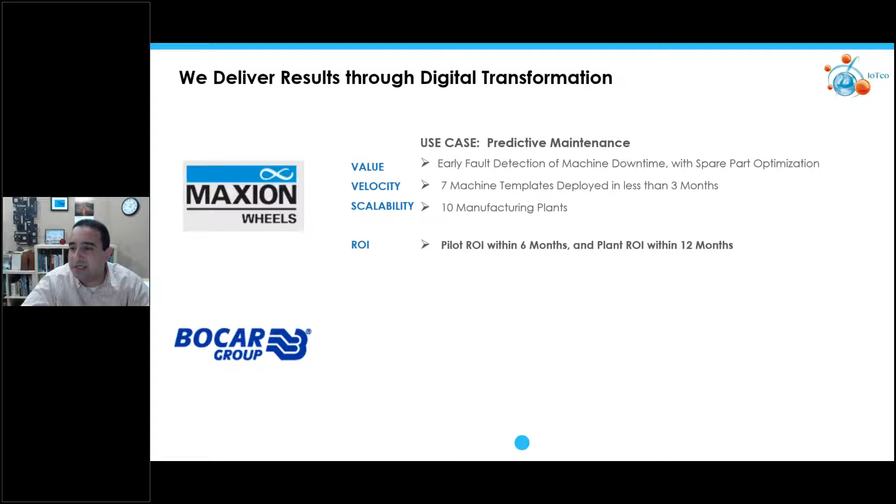But the use case that I'm going to come back to at the end of this presentation is focusing on predictive quality of high pressure die casting. It's a very unique industry. Did you know that the industry norm scrap rates within casting are somewhere between 9 to 15%? So just imagine you're scrapping 9 to 15% of your parts, and it's considered industry normal. You're doing great.

So by using industrial AI in the case study that I'll show you at the end of today's presentation, and correlating the machine parameters, there's about 40 to 50 casting parameters every shot, every 6 seconds, and correlating them to the quality output. Am I going to make a good part? Am I going to make a scrap? Doing this every 6 seconds for every shot of aluminum cast going to the machine can be significant ROI for the business.

We actually call this project the power of 1%, because a fractional 1% reduction in scrap in a mid-sized casting plant, which is about 25 to 40 machines, is around $250,000 in savings per plant per year. That usually exceeds 100% ROI for all the software and the infrastructure that you need to put in place to make that happen. Predictive quality is critical to businesses today. There are some gaps, some barriers that we're going to talk about to make this example happen.

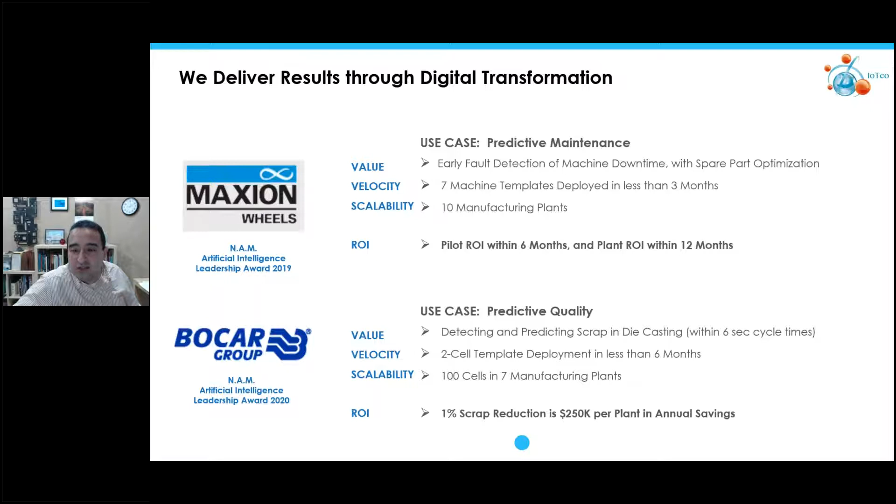Bocar actually received the 2020 AI Leadership Award from the National Association of Manufacturers last year, and I'll be shortly presenting that case study today. So what is Quality 4.0?

Let's start from the fundamentals. There's a lot of definitions out there, but I like a very simple one: it's really the application of fourth industrial revolution digital tools to quality management within the value chain.

Quality 4.0 is not just about manufacturing. My presentation today is focused on manufacturing, but Quality 4.0 has many applications across the whole value chain. This is a great study actually, I can share that with you, but you can also Google it online.

So it's a great publication, but it's also important, as with any other strategy, that we create a clear vision and a clear roadmap of what Quality 4.0 means to your business, and address the people, process, and technology components to ensure success with Quality 4.0. Great publication, BCG and ASQ.

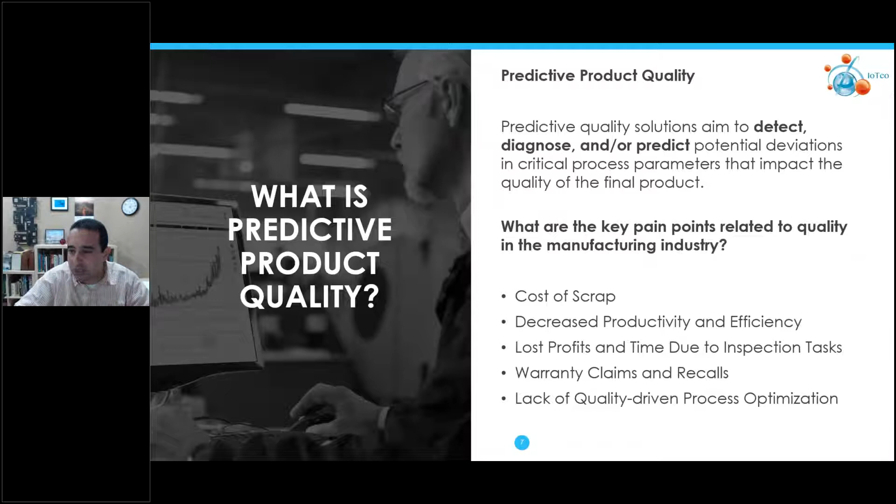So how can we use predictive quality techniques to catch quality issues right at the source - right at the casting machine, right at the CNC machine, right at the molding machine - depending on what is critical for your business?

So keeping this definition in mind, our goal here is really to create a multivariate model. There's a lot of inputs that could affect the quality of the part: there are process parameters, material properties and characteristics that have an impact, product specifications, and inspection and quality information. We need historical data about inspections to be able to build and train these AI models. Not to mention, expert domain knowledge needs to be leveraged into those models to ensure the accuracy of the predictions.

I like this definition because all these areas, all these inputs, need to be leveraged in the configuration and development of a predictive quality solution in order to support the ROI areas and use cases that we discussed, shown here.

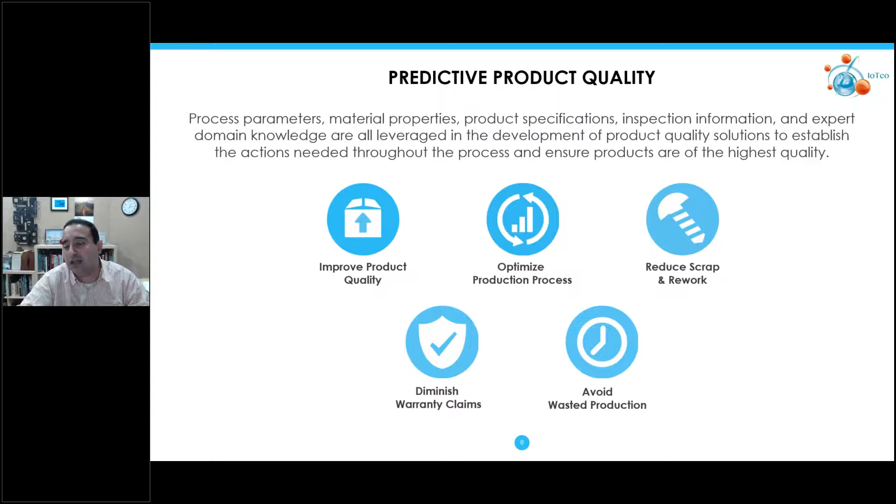And sometimes it's not easy to capture all that data, right? It's not easy to synchronize all that data and bring it together in one place in a synchronized fashion so you can actually run these models. That's one of the bigger gaps.

But before talking about gaps, the application I'm going to show today is automotive centric and consumer packaged goods. But many applications are out there. Think about your business in the electronics and semiconductor industry, making chips.

We had projects where, if you think 40 data parameters in a casting machine every 6 seconds is a big number - in the semiconductor industry there are about 1,000 chemical-based process parameters collected in milliseconds in some cases, that need to be analyzed very quickly, which would indicate the quality of the wafer, the semiconductor chips being produced in a fab, a fabrication area.

So it becomes a big data project, and ingesting that data, working with that data, converting it into actionable information is not an easy task. It requires analytical solutions implemented in a systematic way to improve quality for those, in some cases, heavily regulated manufacturing sectors like semiconductor and food and bev.

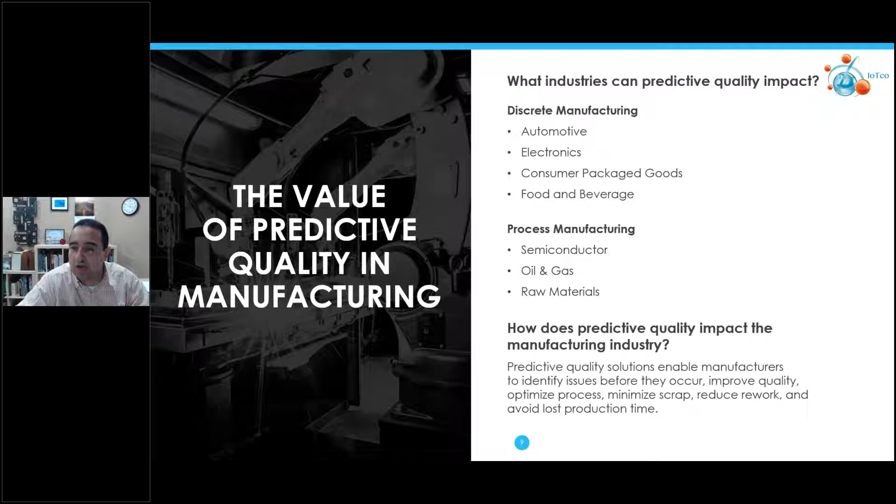So what do we need to make this happen? I'll show you the case studies, but I think this is a great summary of all of them. We need inputs - we need historic product quality data. To model and create any AI type of template, historical data is required.

In unfortunate cases, this may not be available, so we'd have to implement a system and collect that historic data in a synchronized fashion. Expert domain knowledge is always key initially to understand the different product IDs running on the machine. Every product ID has different thresholds, different material characteristics, and so on. That needs to become part of the data map or data model that I'm injecting into my analytics.

And availability of key signals - so we can do this offline, but how can I implement this online? How can I implement this with direct integration to the PLC on my machine, on my line, and an image camera on the cell, being able to handshake the machine data and the quality data? So connectivity and infrastructure are key areas that need to be prepared for us to run these solutions online.

So what is the output? Obviously we're predicting part quality - green, yellow, red. Is this going to be a good part predicted, or a bad part? But in some cases there are suspects - we call them yellows. To be conservative, to be cautious, the yellows and reds, the suspects and the rejects, are rejected, and the green can pass. So that's predictive part quality.

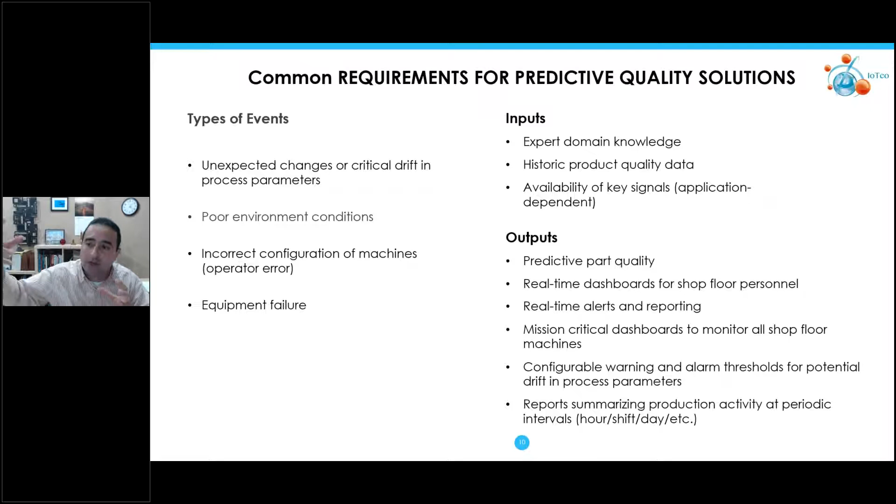And mind you, clients today are using SPC products, statistical process control. But in many cases those SPC solutions are looking at a single variable at a time. The use of predictive quality enables us to use AI and a multivariate approach that looks at all the parameters being collected - 40 parameters, 1,000 parameters - and making correlations. SPC is usually not geared towards that, so predictive quality is a natural extension of using SPC on the factory floor.

So with this short introduction on some thoughts around what is Quality 4.0 and what is predictive quality, I'd like to browse through some case studies and then give you a short motivating conclusion at the end.

So we're talking about what is the relevant synchronized data for predictive quality. We're talking about asset-related data coming from the machine control, process parameters like temperatures and pressures and critical variables that indicate quality, and quality characteristics. Some of them come from the machine, some may need add-on sensors like image data or even video data in some applications.

And then we're talking about ingesting that data, synchronizing it, making sure it's labeled in a proper way for the application, and then starting to correlate the machine data with the quality parameters and delivering use cases for the client.

So when it comes to predictive quality, we're talking about two key metrics here. We're talking about part health: green, yellow, red - good part, suspect part, reject part. So just imagine converting all that data into a decision on part health, and the process behind it that I'm going to show.

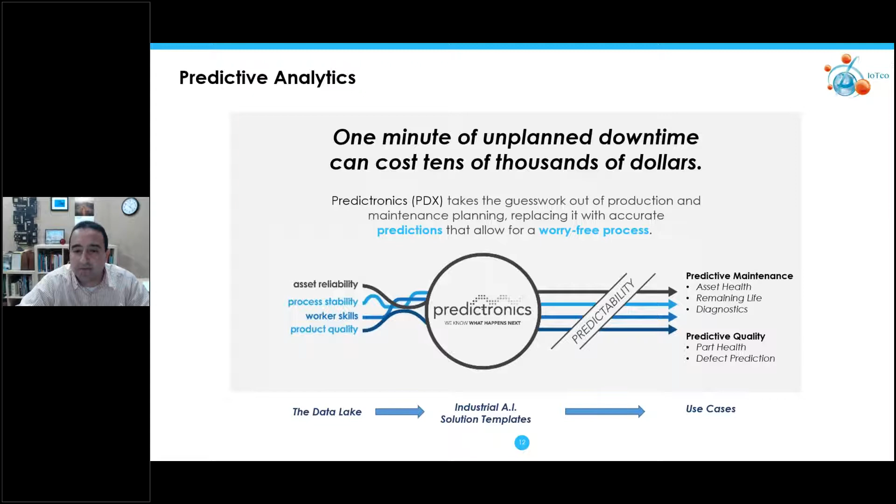So now if we take this and look at the actual process that makes it happen, it is important to follow a systematic process. So the process starts with data collection. It goes into preparing that data, ingesting it, processing it, making sure the data is usable. Some data is noisy, some data requires outlier removal, filtration, and other techniques.

And then feature engineering - extracting statistical metrics from the raw data that are meaningful, that are highly correlated between the process and the quality, the machine and the quality. That's the handshake that we have here.

And then training an AI model that allows us to assess the health of the part. What does green, yellow, red mean? What is part health?

And some of the applications we do are data-driven applications. They are multivariate - 40 parameters, 100 parameters come into the system. Meaningful, highly correlated features are extracted, and then we're able to create a model based on this.

So it's like a fingerprint. This is a fingerprint of a good part. This is a fingerprint or a signature of a part scrap. And it could be scrap type A, type B, type C, type D - you've got different types of scrap modes that occur in the manufacturing operation.

So once you have that labeled data, that correlated data, the solution learns those signatures, and that's your training - that's the training of the AI model. And then you're able to start doing predictions.

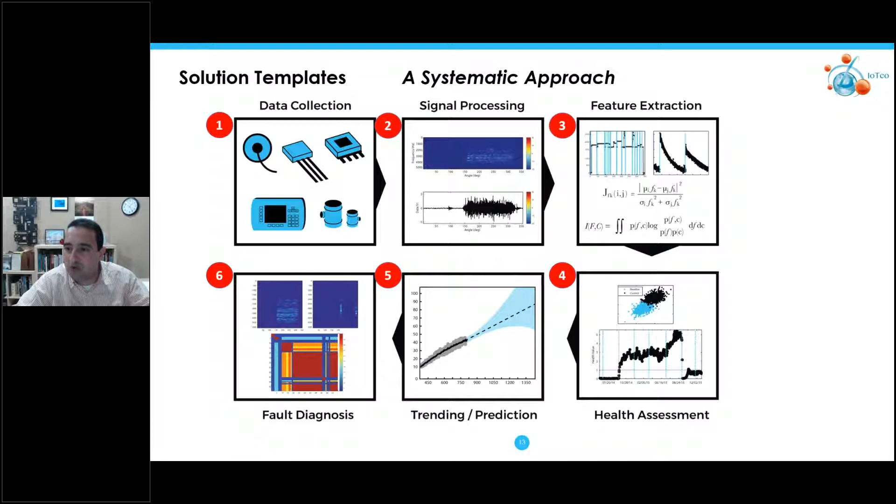And then diagnosis - what is the root cause? I'll show you some examples of how we're finding the root cause, which parameters, which signals are actually leading to the quality issue.

So the challenge here is, when you go into manufacturing, it is not just about robots. It's about - I have robotics, I have CNCs, I have casting and welding and molding, I have stamping. Different parts, different processes. So the systematic approach still stands, it's still the same, but there is a series of templates that need to be created.

Each one of these assets has a different behavior, different type of parts, has a different data map. There are specific parameters that indicate quality of a spot weld on a robot or a laser weld on a robot.

There are specific parameters that indicate casting issues, or my CNC machine has a tool creating the surface texture, the surface roughness of my part. So if there's a degradation in my tool or spindle, I'm going to start having a part with bad surface roughness in a precision industry like aerospace.

So many examples. My message here is it's important to apply a systematic process in different ways to allow the user to understand the specific data map and have that analytics workflow I showed, from signal to feature to part health, part prediction, and part diagnosis, in a systematic way.

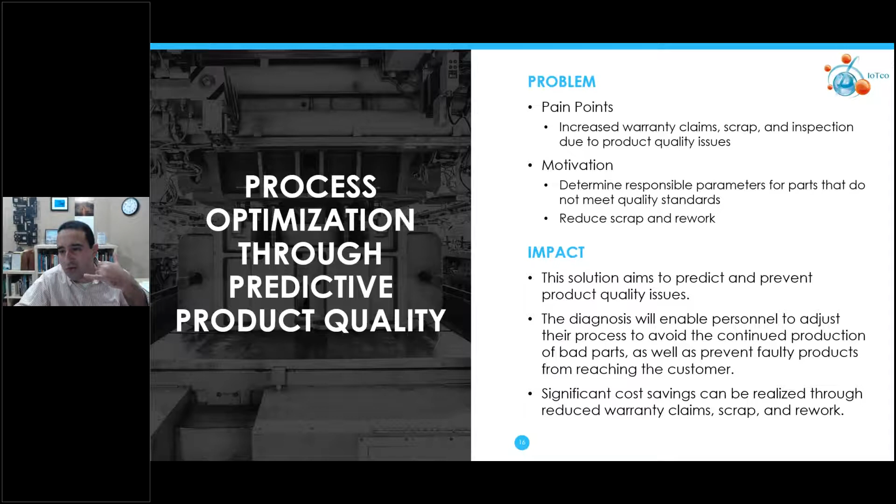So we went into this application and looked at the process. There's a steel coil, a forming station and a line, and then finished ribs like the one you see here. And then there's a defined data map—we need data from the coils, data from the forming stations, and quality data regarding the finished ribs.

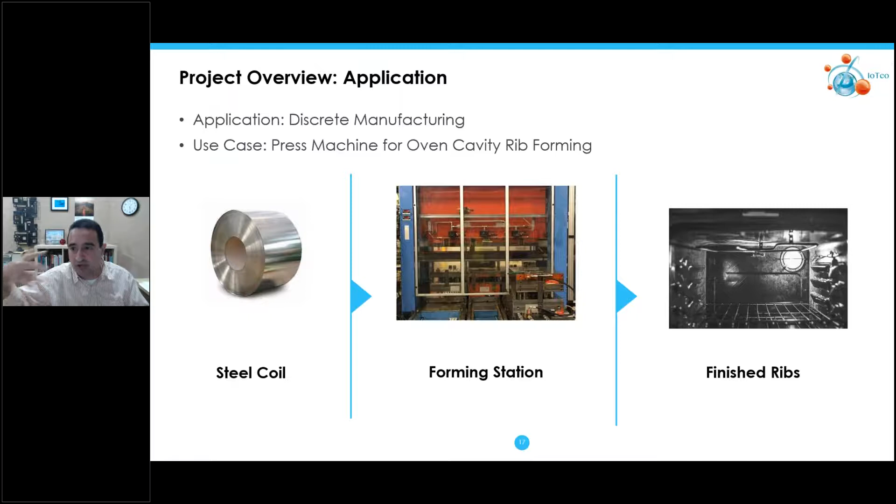And we want to implement an online system for predictive quality that predicts with the highest level of accuracy, right on the manufacturing floor, whether you're going to make an oven with a cracked door or whether this oven is okay to ship to the customer.

So to make this happen, there's a data map. Remember my picture—there's a data map, there's analytics, and then there's a deliverable. So I need to understand the material properties of that steel going into my line, because different material properties exhibit different behaviors on the manufacturing floor.

I need data from my forming station—the operational parameters and specific sensor readings. And that data needs to be correlated with the final product check. So there's a history of the final product check, and a history of some of the warranty recalls that occurred, and the serial numbers that were back-traced.

So let me summarize by saying there's a traceability system, and traceability is very important when it comes to predictive quality. You need to be able to serialize your parts with a QR or a label, and that part in a manufacturing setting is usually traced. There's an electronic trace record that tells you every operation, process parameter, and person—it's like a birth record, a birth certificate of the part.

So now when the predictive quality template is implemented, it's looking at the target quality, and it's making predictions on recommended operation settings of the line that allow me to maximize quality and reduce scrap on the line. So this is not just predicting defects on the line, but actually being prescriptive and making recommendations on the best offset parameters.

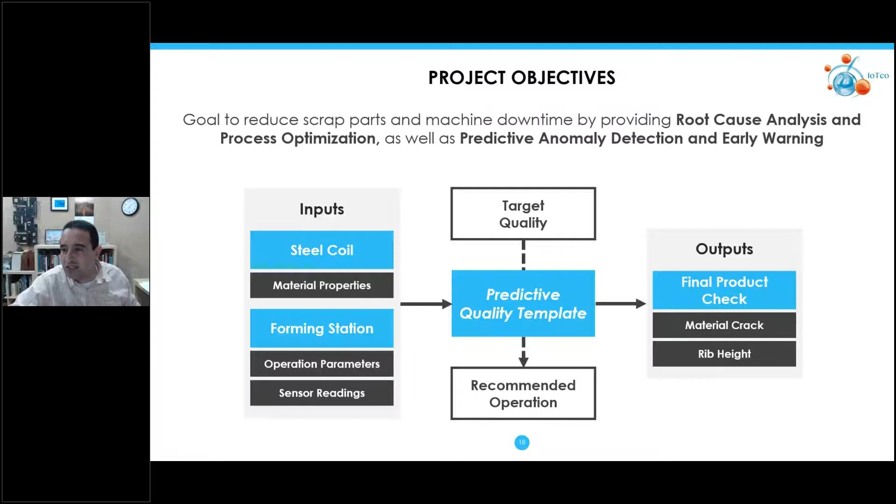So again, it's a maturity scale. We start with data collection, we go into predictive quality, and then we go into prescriptive decision-making or prescriptive quality. This is just an example of some of the information that is being accessed.

The rib height is key, so you're able to monitor the rib height over time. It is a multivariate system, of course, but you can go deeper and look at each variable and the impact of the rib height on the deviations of that variable.

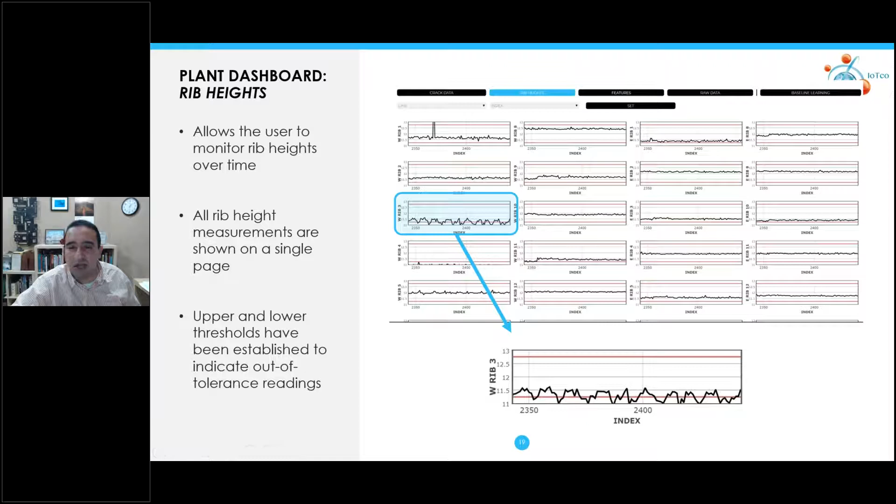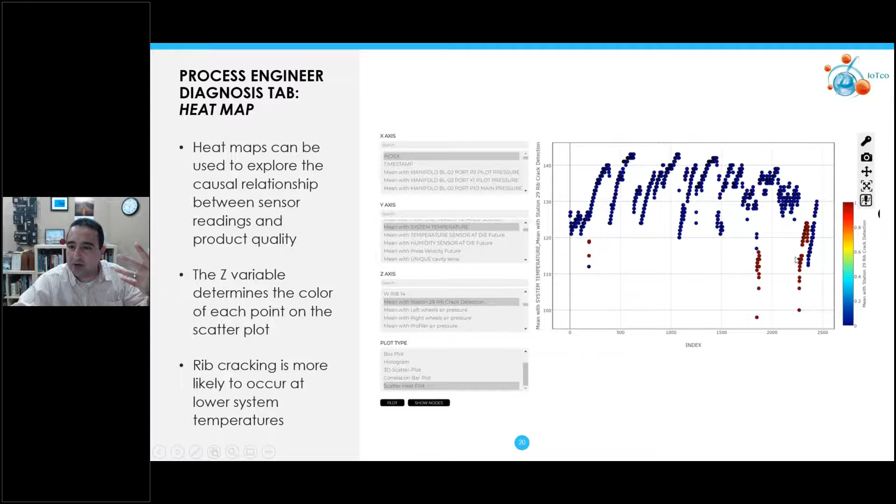All the reds here are actually defective oven doors that have been rejected on the line. In real time, the solution has made a decision to reject them. We visualize this in a user-friendly way for the quality manager, so they understand the temperature zones where there is usually an issue with the oven door. A temperature of less than 120 degrees usually has quality issues on the oven.

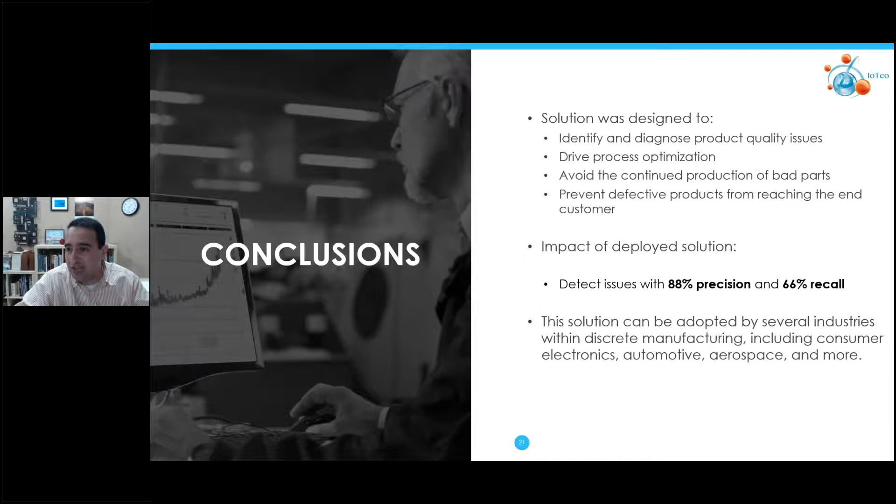For those who might be interested, we were able to hit almost 88-90% prediction precision accuracy on this application, which exceeded significantly the previous quality rates that were in place prior to this system. But at the end of the day, to make the system work, we need a specific data map that makes sense, with correlation to the quality labels and parameters on the line. And we need that business case we're trying to solve, which is: I have an issue on a specific oven type, and there are warranty and recall issues. How can I immediately tackle that problem using advanced analytics?

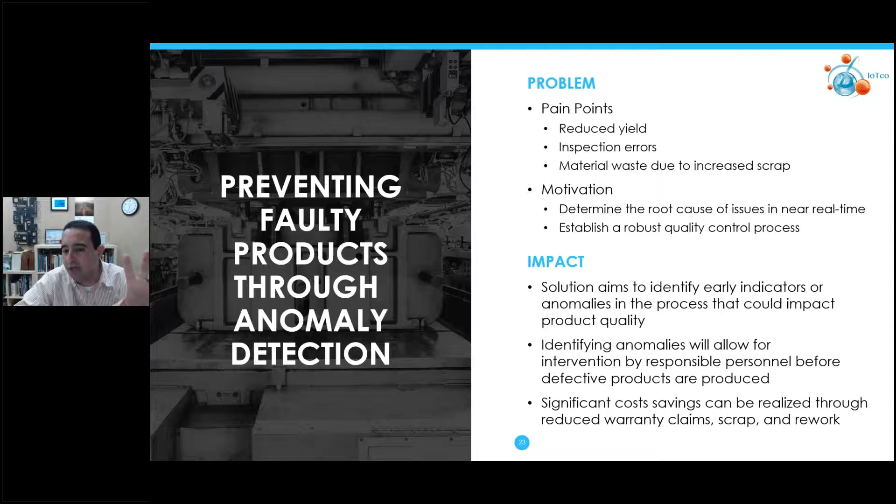Another example is from the automotive industry. Similar use case. If you're interested in the slides, please email me at the end and I'm happy to share them with you. But the motivation here is a little bit different, and I can talk to it.

These guys are making aluminum wheels. If you look at your car, your tires, you've got 4 tires, and the hubs and rims in the middle are actually produced by this automotive tier supplier. Nowadays it's mostly aluminum, because of the light weighting of vehicles.

Low pressure casting is a key application in this industry. In a low pressure casting machine, you're talking about 30 to 40 key process parameters. There's a robot that picks up the part and sends it to machining, first taking it to the X-ray. But due to the volume of wheels, I'm making a wheel every 15 seconds, I cannot inspect every wheel. There's an X-ray machine that inspects, but the inspection time is long, so I have to inspect in a more selective manner. So they started making a lot of scrap, more than normal.

We implemented a predictive quality solution that took historical data from the X-ray, which is pass-fail data, along with the casting parameters. We implemented a predictive quality model that could easily display and auto-reject wheels that are non-conforming.

Imagine you're running this casting cell and seeing this in real time. Green is an acceptable wheel, a good part. Yellow is a warning or suspect wheel that could be bad, because the model's confidence wasn't high. Red is a high prediction of a quality issue. It's visual - you can remove the wheels manually from the line and reject them, or in this case, the robot is automated to auto-reject the wheels.

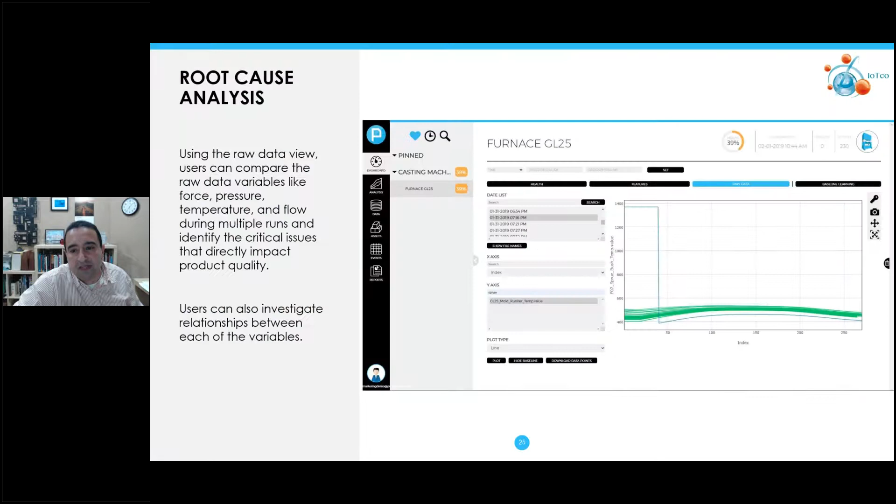So how do I improve velocity, right? I want to make more parts, but I also want to make more good parts that are shipped to the client in a timely fashion. This is just an example of the root cause analysis behind it. Most important thing is, the prediction accuracy is about 96%, okay?

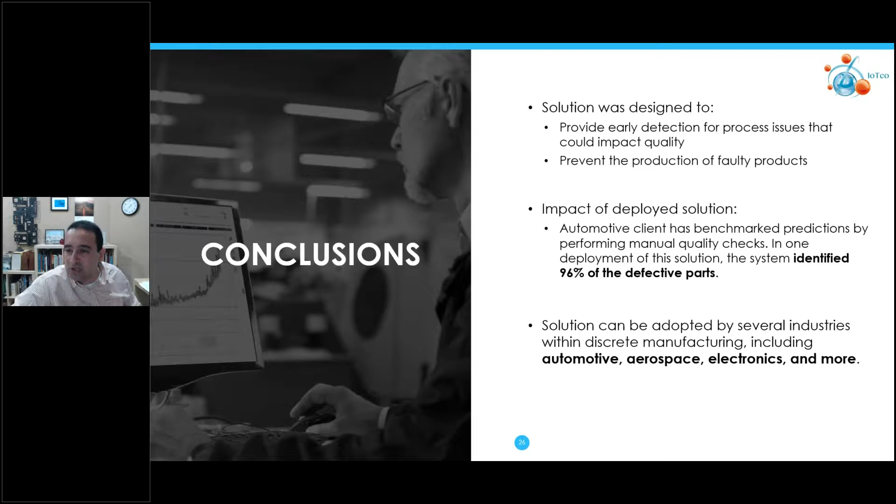About 4 weeks of training data is required for a good wheel and for different scrap type wheels, right? But once that training data is accumulated and the models are trained and validated, usually those type of solutions could achieve about a 95% plus prediction accuracy. Again, very applicable to many industries. Again, this is automotive, but I showed CPG, semiconductor industry. Think about some of those applications for your industry, for the folks on the call.

Last case study, and if you have questions, just please drop them in and we'll come back to them. But high pressure die casting is key in the automotive industry, and this is a good concluding case study because it goes back to our early conversation about business case. Business case drives everything, especially in these industries where the margins are extremely slim. Automotive industry margins are extremely sensitive.

And if I'm catching quality issues in the foundry, okay, the cost to rework, maybe remelt the part is about $3.8. Okay, but look at how it jumps, right? If I catch the quality issue in machining, if I catch it in the assembly area afterwards when I'm doing painting and assembly, and if it goes to the customer, not to mention the warranty recall claims that may potentially come out of this.

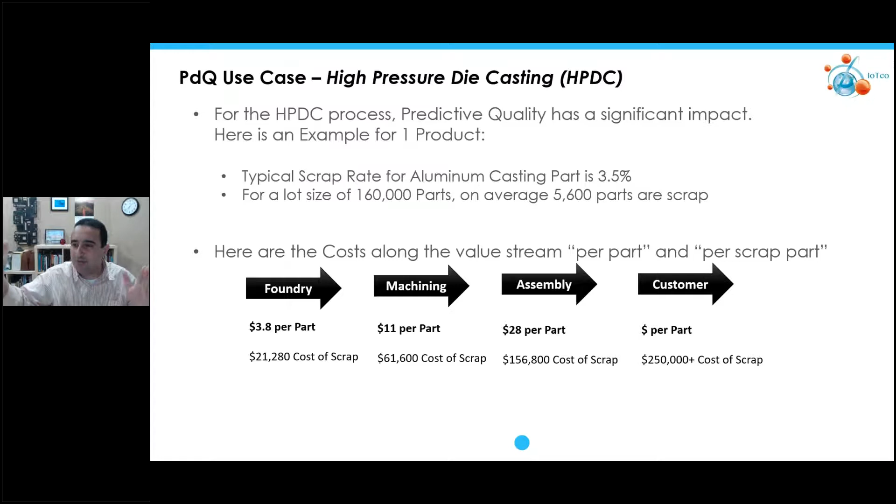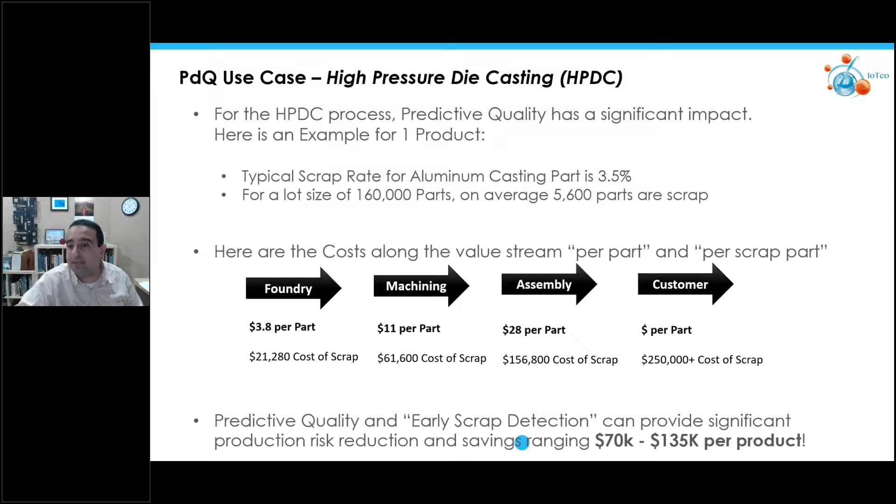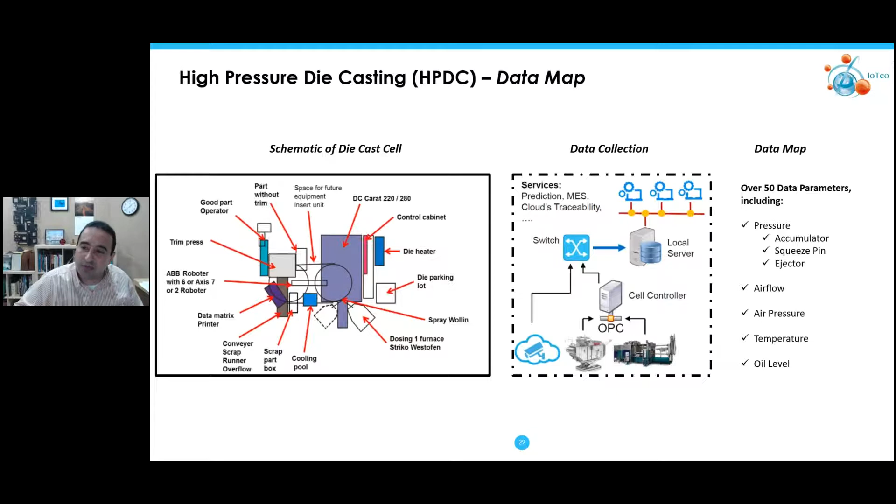Okay, so keeping the business case in mind, this is a bit more of an advanced case study. There's a lot more moving parts. Okay, there's about 50 casting parameters for every shot that I had mentioned briefly earlier, right? Every 6 seconds, there's an aluminum cast shot into the cavity, and there's 50 parameters collected from the PLC, okay? Some of the key parameters are actually listed here. The pressures, the airflows, the temperatures, the oil levels.

Some of the data, by the way, can be used for predictive maintenance of some of the key assets here, like the trim press, the die, the dosing furnace. But the parameters exhibit different thresholds for different product IDs that run on the machine. And by implementing AI and a multivariate analysis of those 50 parameters, we're able, with a high level of accuracy, to correlate them to the part quality and make prescriptive decisions on the machine.

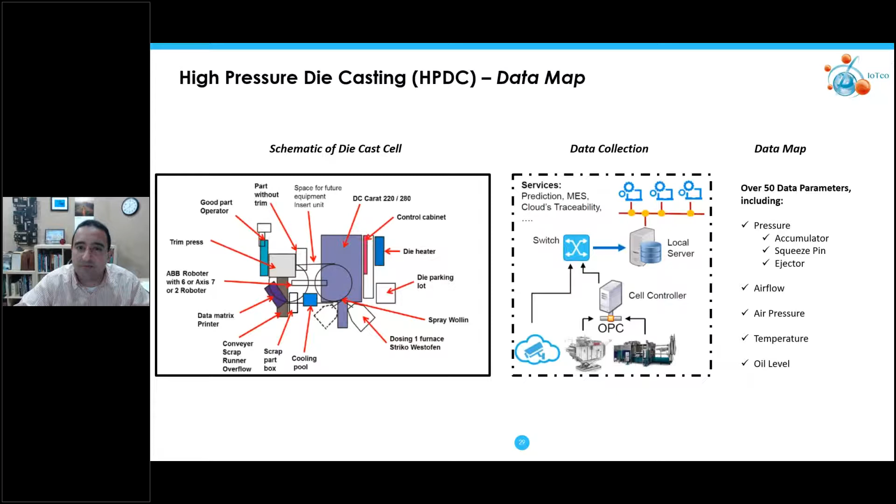So the training of the models when it comes to PDQ is a bit more intense. But once it is done once, it actually would run for a lifetime, and it would deliver value to the business. So this is a mission critical solution, actually.

Quality 4.0, unlike predictive maintenance, is mission critical. It's actively predicting, actively prescribing action within seconds. It's an online solution. With predictive maintenance, it might take time for my machine to fail. It might take a day, it might take a week or a month, right? But with Quality 4.0, I am making decisions for every product that is being produced on that machine.